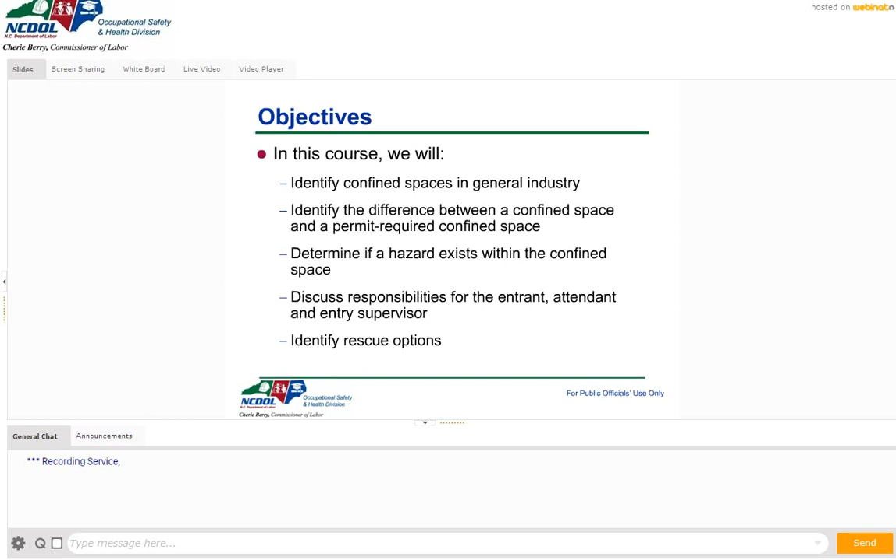And if you have a permit space, you have to pre-plan for rescue, and we're going to talk about rescue options. I've got a couple of videos today. If I have time, I'll show them. We'll see how we do on time. So let's continue to the next slide.

Now, of course, this standard, the general industry standard, contains the requirements for entry into permit required confined spaces, but it does not apply to agriculture, construction, or shipyards because they have their own standards. So right here, you see a manhole cover, and it's very small, hard to read, but it says that it's a permit required confined space right there in the manhole cover.

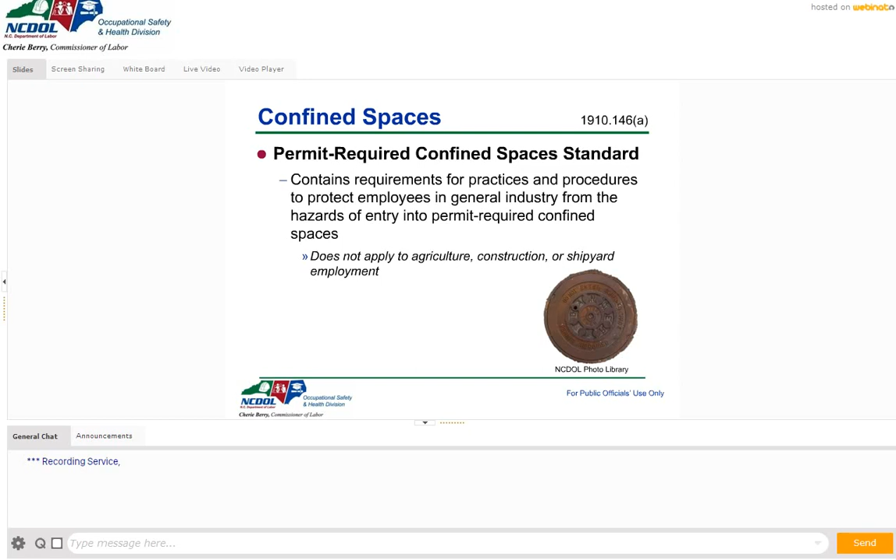Now, many of you already know this, but a confined space is big enough for you to put your entire body in that space and do work. But it also has limited or restricted ways to get in and out. A manhole is not easy to get in and out of. There's usually a ladder built into the side if you go in, or you may have to insert a ladder. It's hard to get in and out.

People typically don't work in manholes all day long. I mean, all year long. It's not designed for somebody to be in there every day of the year. And like the last bullet says, not designed for continuous occupancy. So it's big enough to get in, it's hard to get in and out of, and it's not meant to be a space to have somebody in there all the time.

Now, many of you live in homes. Some of you may be in an apartment, but if you live in a house, what are two home examples of confined spaces? Okay, Michael. Crawl space. And it could be under a trailer, like you say, or under a stick-built house. Attic and crawl spaces. Those are confined spaces.

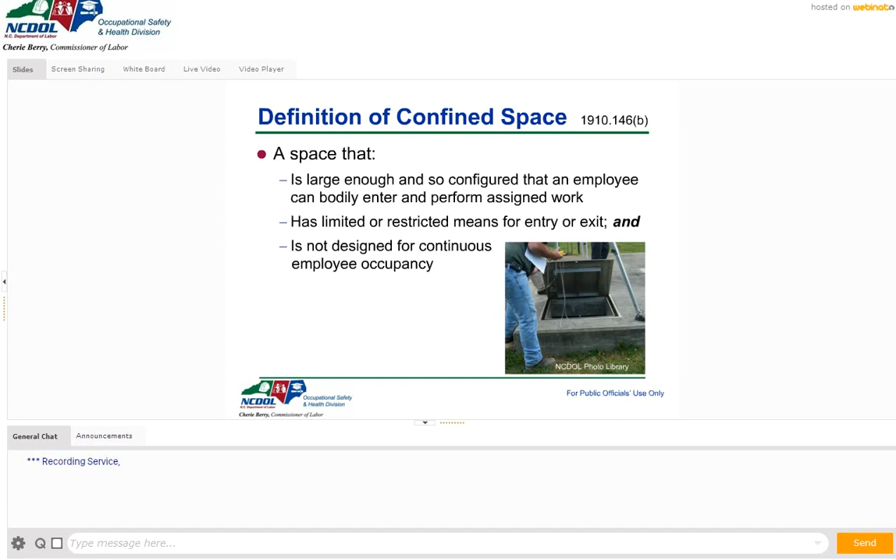So the thing that makes a confined space a permit space is all these three things that we've listed here, plus it either has a hazard or a potential hazard. And I would say reasonably anticipated potential hazard. So that's what would make it a permit space. But regular confined spaces may or may not be permit spaces.

Are you sending an employee into a tank, into a manhole sewer, into a grain storage bin, boilers, ducts, tank cars, vaults, sewers, pipelines, certain equipment and machinery, tunnels, open top spaces greater than 4 feet?

Now, if you walked along a floor and you saw a big square area recessed into the floor that was 4 feet or deeper, and there's no way to get in and out of that space, automatically that would make it a confined space. If it's a permit space or not, that depends on whether there's any hazard or reasonably anticipated hazard in that space. Now, I want to give you a common example of a permit required confined space that you may have at your workplace.

Now, everybody out there, I don't care if you work for the government or private sector, you all have trash. And what kind of confined space that might require a permit could there be? Now, a dumpster. A dumpster is a good example of a confined space that might not necessarily be a permit space. And Stephanie, you're going right into what I'm looking for.

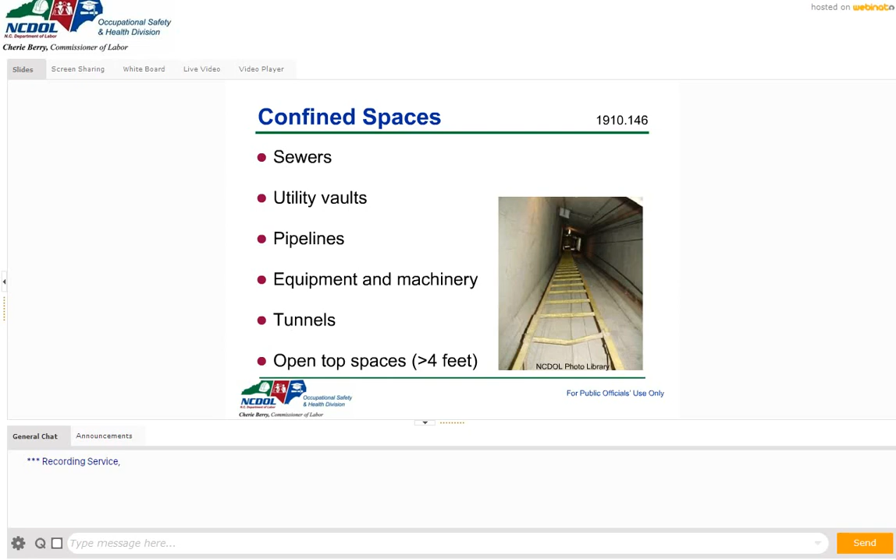But if you have a trash compactor, the way I look at it, I would have that thing labeled permit required confined space, do not enter. If you can eliminate all those causes, then you can reclassify it just for that particular entry as a non-permit entry. Okay, so let's keep going. Now, permit spaces could have several hazards. Could a trash compactor have a hazardous atmosphere inside there? Is that possible? Yes, absolutely.

Does the space have inwardly converging walls or sloping floors? So you got things like tanks and grain bins where you can slide in, it gets narrower and narrower, or you can become entrapped, or you can be engulfed. If you're in a grain bin and you fall in there, it's like quicksand. You fall into the grain, you start moving around. That allows your body to go deeper and deeper, and the grain collapses around you, and you can't even breathe, and you die in there. So like a grain bin.

Engulfment could be from water. When you enter the confined space, are there pipes in there with water supply? They could break or for some reason open up and engulf the entrant. Or there are any other recognized serious safety or health hazards. Now we're going to talk about a lot of the different hazardous atmospheres, but there could be other hazards. You can have snakes in there. You can have moving parts in there. You can have electrical in there. So you need to know your stuff before you or somebody tries to go in there, because you don't want anybody to get hurt.

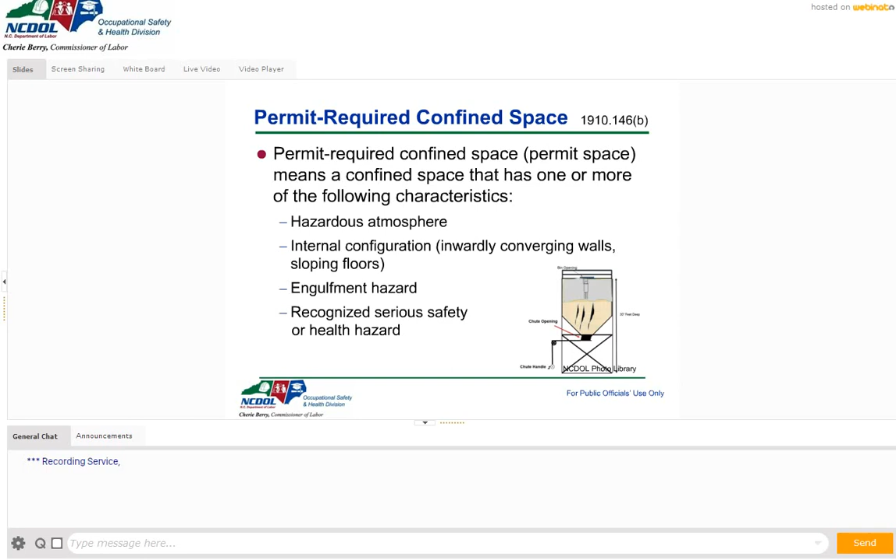Now, other hazards: not enough oxygen. Now, what percent oxygen would be considered low oxygen? How much oxygen? Less than what? This is for your advanced students.

Yeah, actually, it's less than 19.5%. 19 is pretty close. So this 19% is oxygen deficient, so you're not going to go in there. You're going to be doing an investigation. And Michael, that would be less than atmospheric, but there's a range. There's a little variability on your oxygen content in the atmosphere.

So, if it's oxygen deficient, your employee could die in there from not having enough oxygen, or it could have too much oxygen. If there was too much oxygen in there, of course, that could be from some oxygen supply. What would that cause? Potentially, too much oxygen. What would that support? Too much oxygen. Combustion, right, or fire or an explosion.

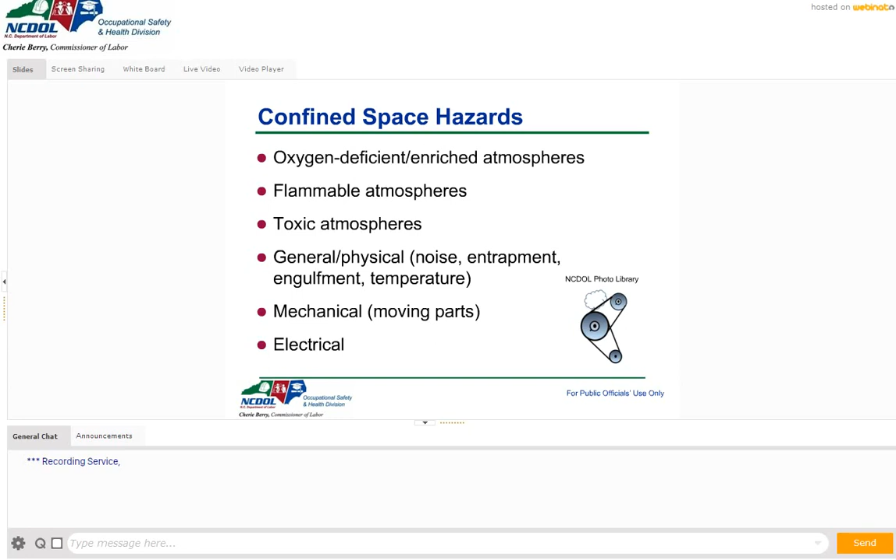Okay, now let's go to the next slide. Now we want to eliminate our hazards or control them. You want to lock out moving parts, de-energize your electricity, block steam, blank steam pipes and in-feeding pipes, pump out liquid content. So if you're going underground and the space is full of water, we're not going to send somebody down there to work. We're going to pump that out. And we're going to monitor the air and ventilate the space.

Now, because this was a permit required confined space entry, we had to sample the air.

So if you're a company that you're doing a permit space entry and you're checking the atmosphere, how many levels of monitoring are you going to do? Bottom, top, middle? How many levels? At least what? How many levels of monitoring are you going to do? I'm talking about how deep. Does anybody know? I know somebody must know. How many? Okay. The answer is 3.

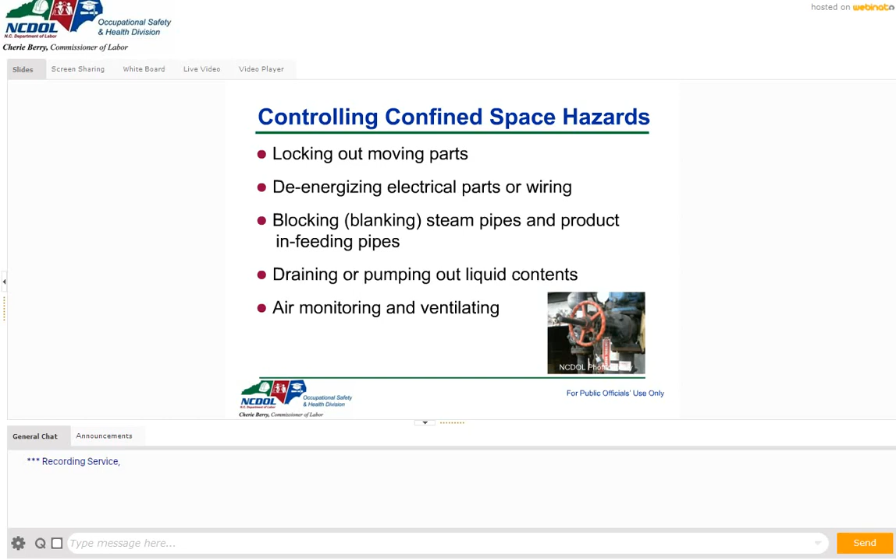So if you're checking out a space prior to entry and you're following your permit and you get your meter and you check the atmosphere, you're going to check the top of the space, the middle of the space, and the bottom of the space. And you're going to give your air sampler time enough for the sample to get to the meter itself. Okay, you're going to do 3 levels of monitoring. All right, let's keep going.

Now, we'll get back to the permit procedure in a few minutes. Now, this slide says if you have a workplace and it contains permit spaces, the employer should let everybody know by posting signs or any other equivalent and effective means. So if I go to your work site and I say, do you have a confined space program? Yes, we do. We have permit space. Are they all labeled? Yes, they are. Good.

If their permit spaces were not labeled, we would have to interview every employee and say, can you name all the permit required confined spaces? Now, if it's a big site, I'm betting that they can't do that. So this says other equally effective means. So if you didn't mark them, everybody would have to know. I would not want to depend on that. And you would also have to have a controlled site where nobody else could get on your site. So not having a mark would not be a good idea. Okay? That's required right in the standard.

Now, if you decide that all your employees will never enter these spaces, you've got to have a measure to keep all your employees from going in there. So, how would you? And now manholes, we can have HVAC units. You can have a lot of other places people could go. But how are you going to keep people out? How do you keep them out of a permit required confined space? How do you keep people out? Well, I'll let you all type in the answer. How do you keep people out of permit spaces?

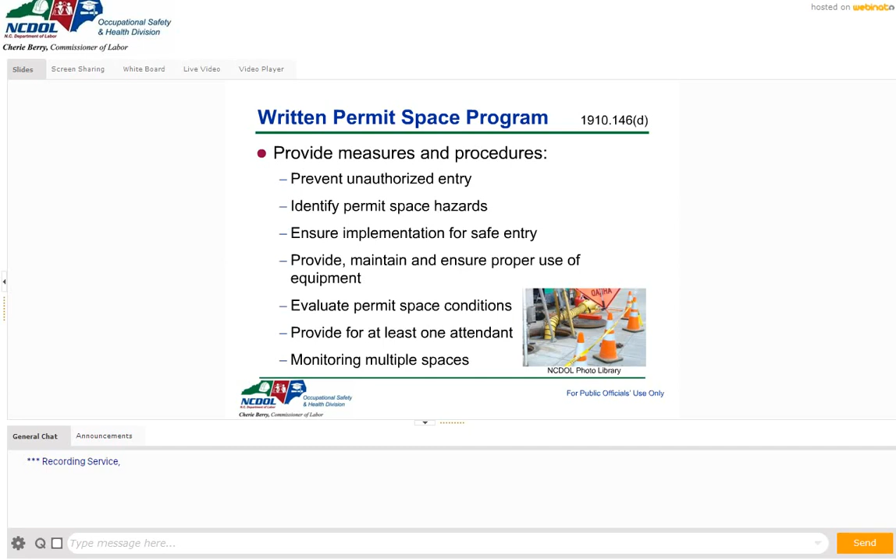How do you determine who does what? You're going to train your attendants, your supervisors, your entrants. How do you summon rescue? And we're going to spend a bit of time on rescue. How do you prepare, issue, use, and cancel permits? If you have a supervisor that issues a permit, they may cancel it because it's outside and a rainstorm develops, a storm develops, some conditions change.

How do you conclude entry? How do you coordinate with other employers? You may have contractors working with you. And how do you review your program annually to make sure it's current and nothing has changed?

So, with your confined spaces, you could have spaces that never require a permit. Those are just your regular old confined spaces, and there's nothing in the world that could develop to make them into a permit space. Or you could have spaces that all you'd have to do is ventilate those spaces, and you would not have any other hazards, and you would not have to use a permit. Or you have spaces that have more than one hazard, and that would require a permit system.

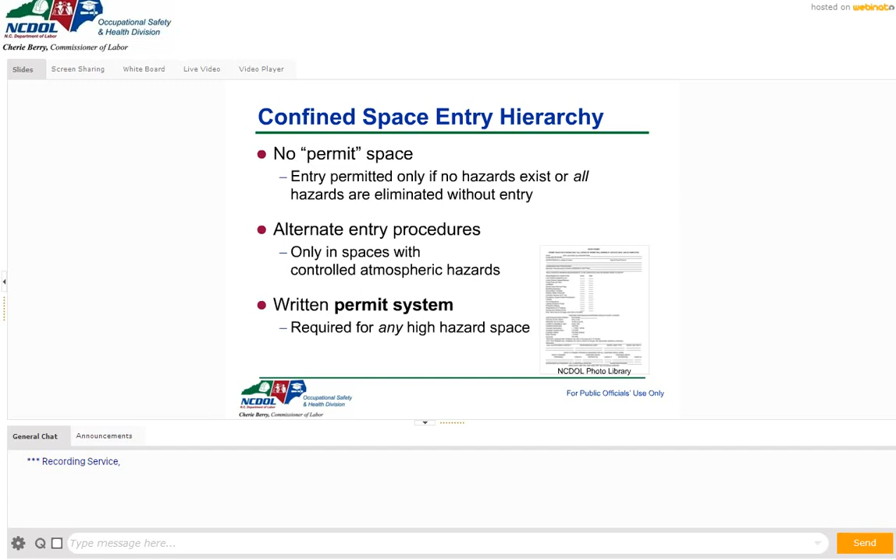Now, I will tell you, when I was in industry, I worked in a best practice facility. I worked for two companies that were Carolina Star, and anytime we sent somebody underground, we never reclassified any of those as non-permit spaces because too many things can happen underground, too many variables. We could have gotten by with reclassifying some of them sometimes and just do ventilation only, but anytime we went underground, we said we're doing a permit every time to be safer.

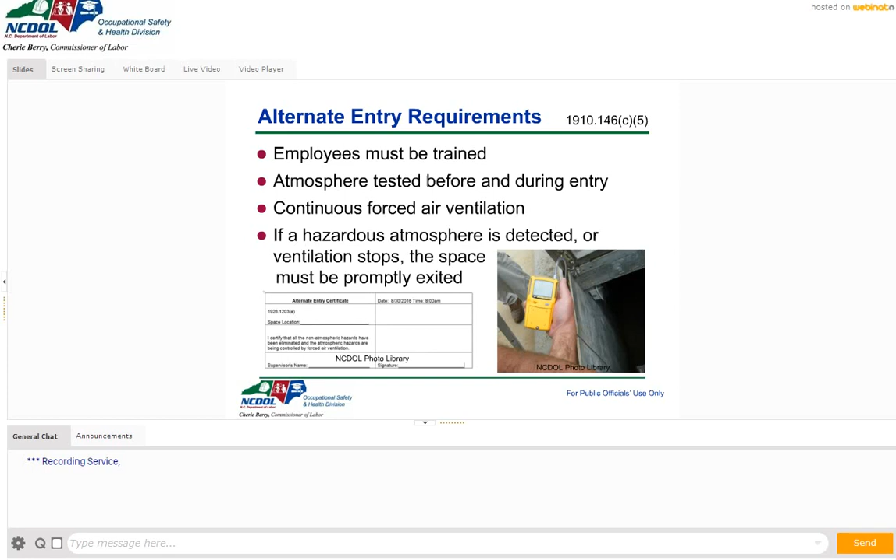Now, if you do alternate entries, your employees have to be trained, you have to test your atmosphere, you have to use forced air ventilation, and of course, if you ever detect a hazardous atmosphere, you must stop the entry. So that's your alternate entry. Now, this will be a little bit easier to understand if you look at the flow diagram that we're getting ready to go into. Here in a few minutes, we'll get to it.

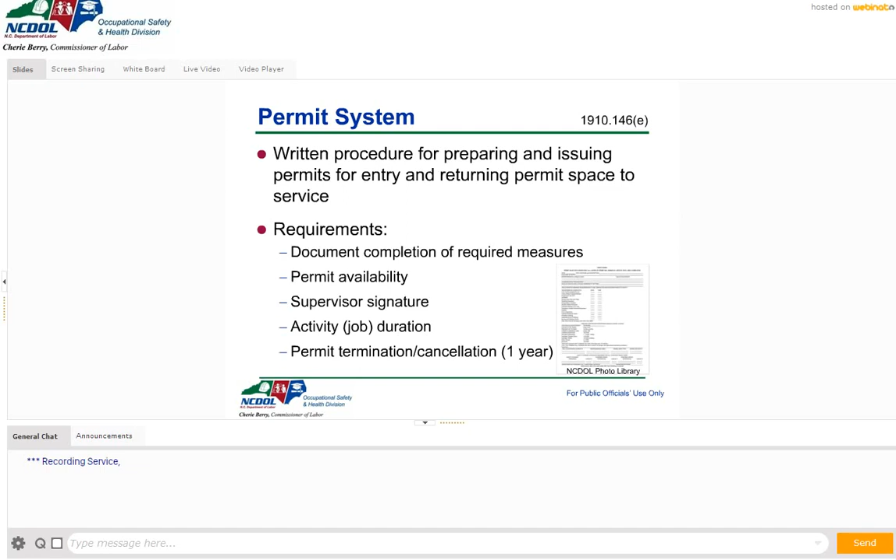Your permit system, you're going to have a written procedure for how you do it. And you've got to make sure your document's properly completed, that it's there at the site, it's available, that the supervisor signs it. You've determined your job duration. And those permits that you issue for permit entries, they must be reviewed within a year to make sure that they're still good, that the spaces have not changed in any way.

So when you have somebody entering one of these spaces under a permit, it's got to have a place for what is the space, why are we going in here, when and how long is the person in there, who are the authorized and trained entrants, who is the attendant, who is the supervisor.

Now, go ahead and ask you a question. Can an attendant be a supervisor and an attendant, or do you have to have two separate people? This is really a good question. I'll wait for some more answers. Actually, the answer is yes. You can. You can have a situation where the attendant is also trained and authorized to be the supervisor. Now, where I worked, we had separate attendant and supervisor, but the standard does allow, if they're properly trained, to have the attendant be the supervisor as well.

The permit's going to talk about the hazards within the space that you've addressed, how you keep the space isolated, and what the acceptable conditions are.

Well, good, Michael. And that's fine, Michael. I mean, a great answer would be two. Ideally you would have two separate people, but there are situations where it's acceptable and safe to have the attendant be the supervisor, have both roles. But when I was in industry, essentially our maintenance folks would be the ones that went into the spaces, and the maintenance supervisor, who was a supervisor anyway, was the confined space entry supervisor, and they were all trained.

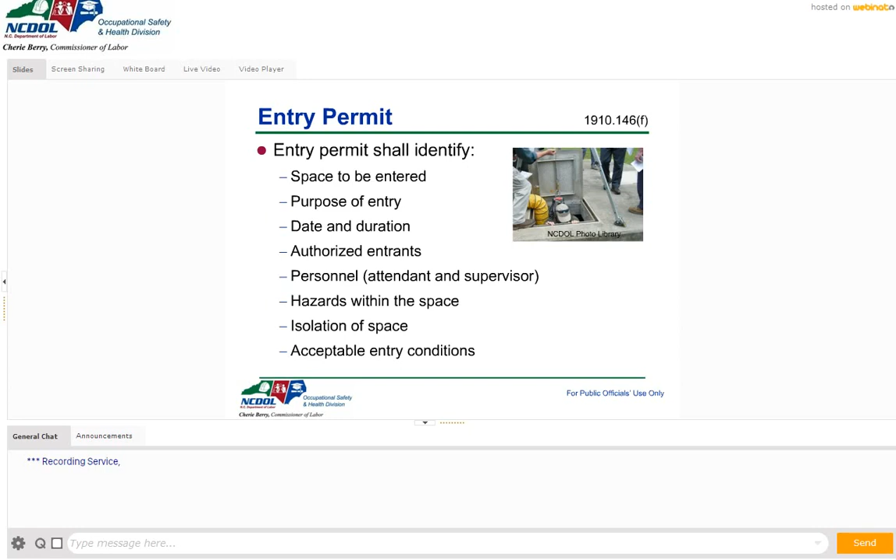Okay, now your permit's going to have your results from your air monitoring. It's going to specify what safety equipment you're going to have on site. How do you control the hazards? How do you communicate? There are a lot of different ways you can communicate. You don't necessarily have to have radios. Some people use ropes. They use knocking, or they may have direct voice communication. There are a lot of ways to do that. And your permit's going to have the rescue and emergency services information on there.

Now, this is where you really need to be careful. And this is why a lot of people die in confined spaces. You'll have a good company, they just don't know any better. They'll create a confined space entry program, and in their program they don't do rescue. And what do you think's on their permit for rescue? This is a good company. What's on their permit? Fire department, right, David. They'll put in an emergency call 911 or the fire department.

Do you think in most cases, now let's just talk about hazardous atmosphere, do you think most of the cases the fire department can get there fast enough? What do you think about the response times? No, that's exactly right. So what happens, let's just play worst case situation. The fire department responds, and instead of having one victim, they've got three. They had two people try to rescue, and they got three bodies at the bottom of the space, and it becomes a recovery operation.

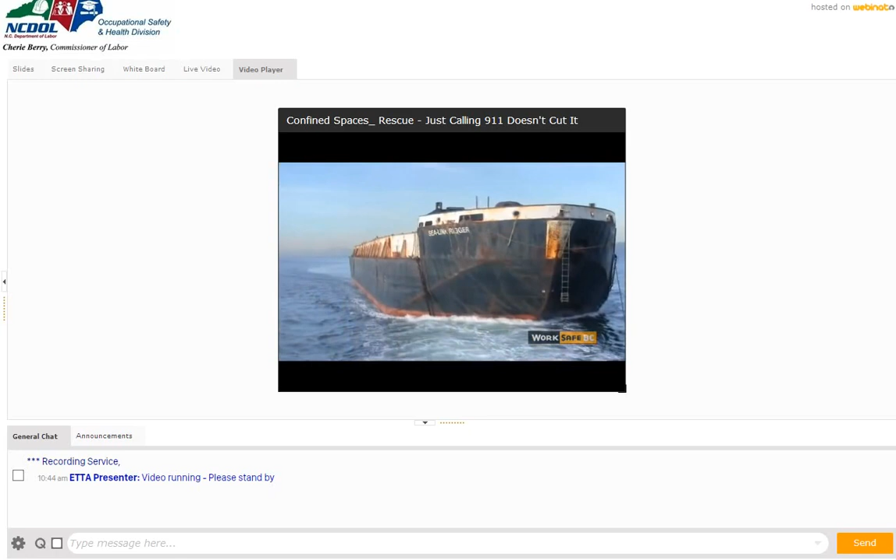It happened in a vat at a winery in the Okanagan, in a shed at a mine in Kimberley, and in the rusty hold of a barge in New Westminster. Each time, workers died when they entered a confined space with not enough oxygen to breathe. Even worse, rescuers who tried to save them also perished.

Incredibly, about 6 out of every 10 people who die in confined spaces are would-be rescuers. This sobering reality means that for any work around a confined space, there has to be a rescue plan that's tested and ready in advance. The rescue from a confined space is, in most cases, a body recovery. You're going in to pick up somebody who has died as a consequence of an exposure to a toxic atmosphere or low oxygen. It's a real problem.

Can you hear me? Can you move your feet? I can see a foot. Can you wiggle it for me? Try and move that foot a bit. Okay, patient's unresponsive. Rescue 1, let's get ready to go. Rescue 1, ready to go.

If you follow the procedures, you have a proper confined space entry program. You do hazard identification and risk assessments. You look at what the job function is going to be, what you're doing in the space. Are you going to create any airborne contaminants? And you have an atmospheric monitoring program in place. You have a lockout and isolation program in place. If you do all those things to mitigate the hazard to the worker, you probably shouldn't end up putting a worker in a potential rescue situation.

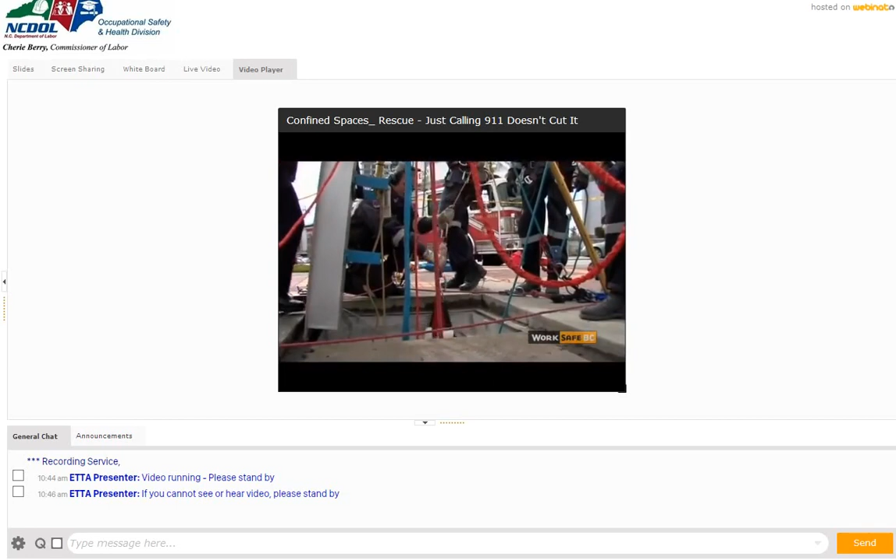But you always have the medical component. Somebody has a heart attack or a medical problem within that space. How are you going to get them out of that space? And who's going to do it? Most modern fire and rescue departments have some technical rescue capability, a skill that requires constant training and practice. That being said, industry must take responsibility for assessing risk and preparing to deal with it. Industry used to say, well, we'll call 911 in the event, but some jurisdictions, some municipalities don't have that capacity. Some fire departments are small and they don't have a confined space rescue capability within their department, so just calling 911 doesn't cut it anymore for a rescue plan.

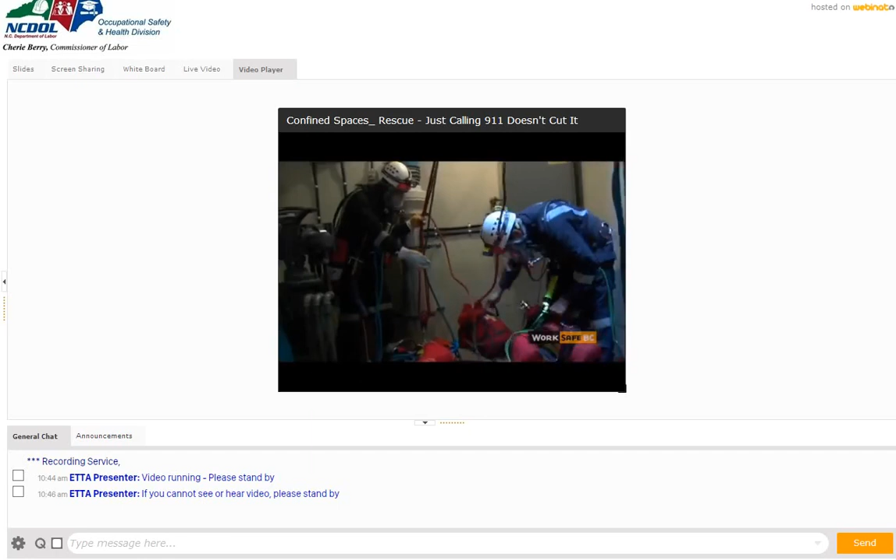We train right now. Last year our team documented 5,400 man hours of training for that year. The key point is competency. Is that team capable, equipped, and able to perform a rescue? And a rescue doesn't mean that you have a tripod sitting here and you got a winch. It means you need to have a plan in place, and you need to practice that plan, and that you can actually extricate somebody out of that space. Human nature is such that we assume things are reliable and predictable, but when it comes to working in a confined space, the dangers are often invisible. Response time is critical, but so is ability. The path to hell is paved with good intentions, and these people go in and they try and rescue, and they end up being victims themselves.

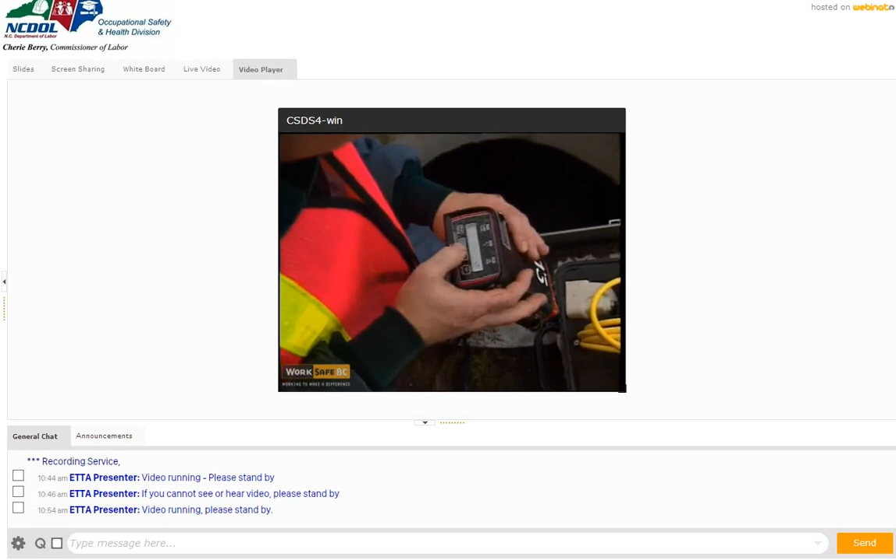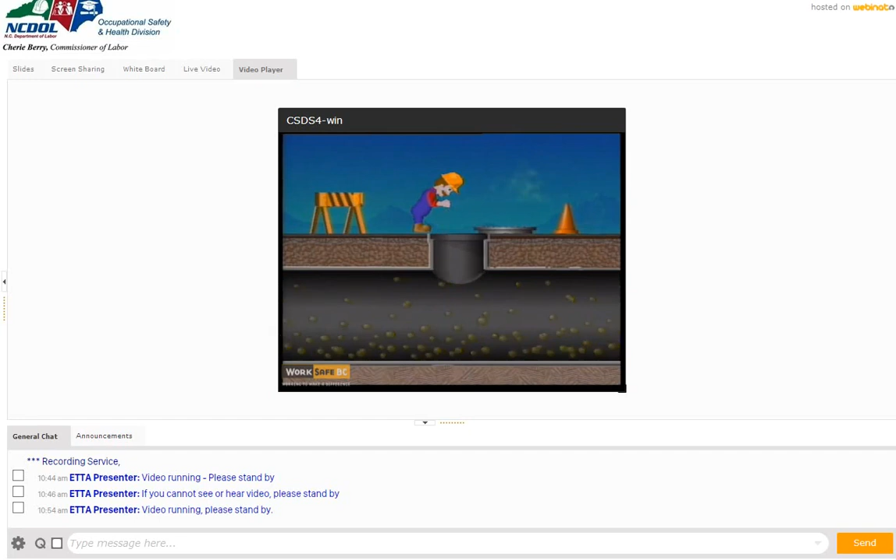Before entering any confined space, ensure that the surrounding area is free from hazards. Test the atmosphere before you enter a confined space. It's essential that you take samples at various levels throughout the space. The first test to conduct is for oxygen. Oxygen deficiency can occur at any level. Some gases, such as hydrogen sulfide, are heavier than air and could settle on the bottom of the confined space. Methane will displace oxygen. It is an explosive gas and is lighter than air. Carbon monoxide has about the same weight as air, so it can be evenly distributed throughout the space. It's an asphyxiant, which prevents your body from absorbing oxygen, causing you to suffocate.

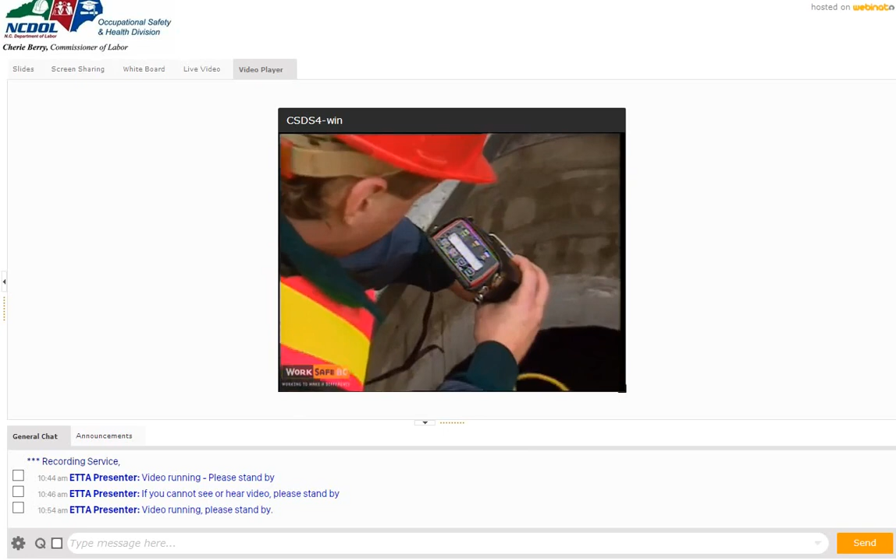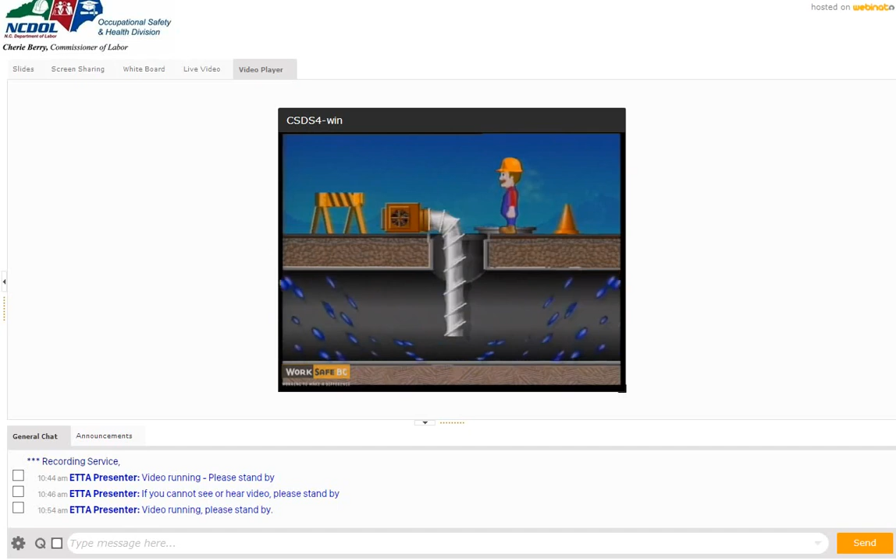Ensure that the tests are taken by a trained worker, and the results are recorded in a logbook or on an entry permit. If gas levels are unsafe, you must first ventilate and then retest before entering. If the gas levels are within safe limits, you must still ventilate the space before entering. Never use the ventilator like a vacuum to draw air out of the confined space. It may draw in toxic gases from other parts of the space. The fan must blow fresh air into the space. Ventilation will provide a continuous supply of fresh air and prevent the buildup of contaminants. While workers are in the confined space, ensure that there is a worker on watch who can summon a rescue crew in case of emergency, or is capable and equipped to conduct a rescue.

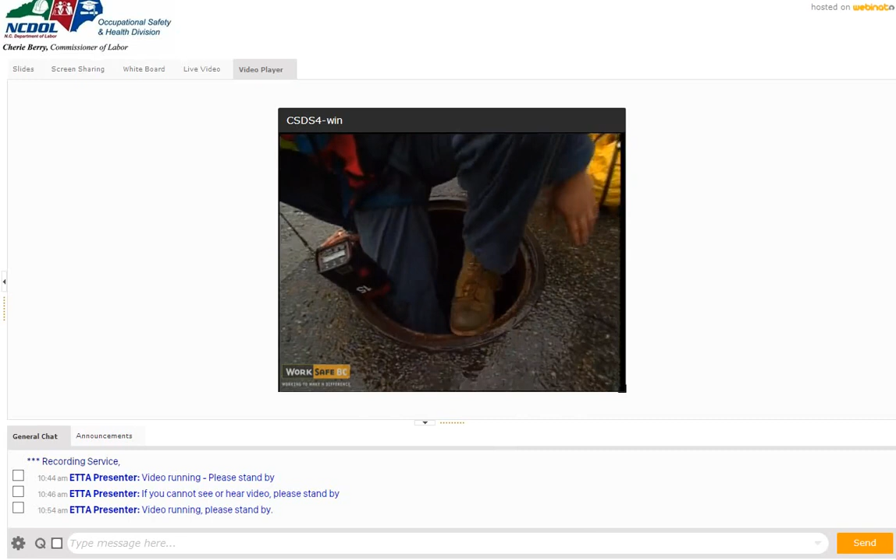Depending on the hazardous nature of the work or type of confined space, more sophisticated equipment and procedures may need to be used. For instance, workers may need to use a harness or lifeline attached to a tripod and wear a continuous gas monitor. There are even situations where a worker may have to wear a self-contained breathing apparatus.

In summary, ensure the surrounding area is free of hazards. Test the atmosphere inside the confined space. Ventilate the confined space. And finally, ensure that a man watch has been initiated and emergency procedures have been established.

Confined spaces can be found on many work sites, but their hazards may not be obvious. Preparation and testing are your only defenses against this potential killer. The danger is real, but by following established work procedures, most confined space tragedies can be prevented.

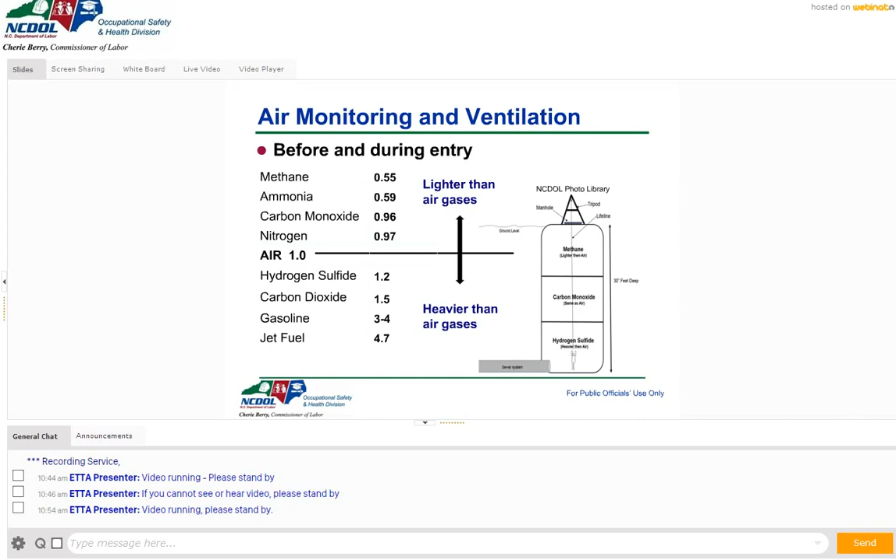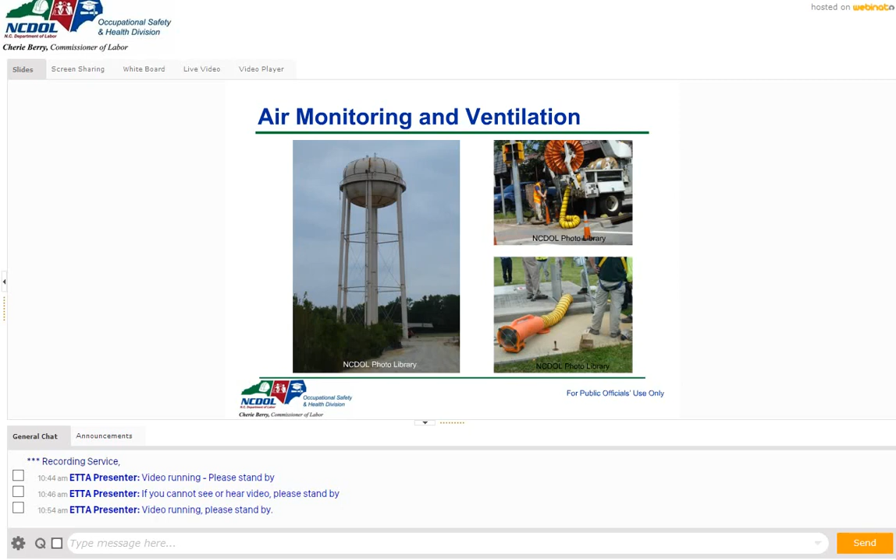Now, you can see there are several different types of confined spaces. It could be a tank, like a water tank. It could be underground. We talked about ventilation. And we talked about the different roles. The entrant is the person that goes in. The attendant is the person that monitors. And the entry supervisor plans, authorizes, and terminates the entry.

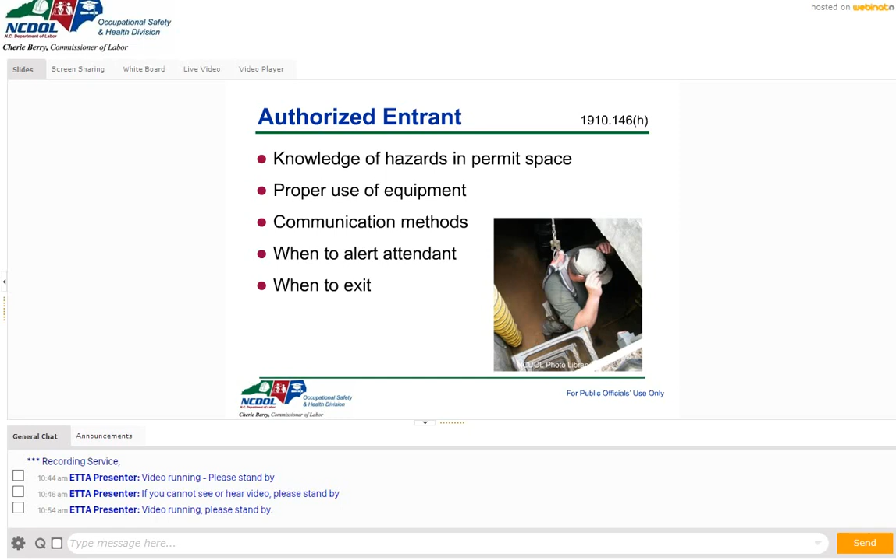Now, you can train people for several roles, but don't put them in a role where they're not trained and qualified. Those are the duties. The person that goes in, they need to know the hazards that have been identified or potential hazards that could develop, proper use of their equipment, how they're going to communicate, when to alert the attendant, and when to get out.

The attendants, the person outside, they know the hazards or potential hazards, and they know the kind of behavioral effects that could be impacting the entrant. If they start slurring their speech or sounding drowsy or something, they would know to do something. They need to keep a count and a log of who's in the space. They just need to stay outside the space the whole time.

They need to communicate with the entrant constantly. They need to monitor everything. They need to keep people away from the space. You may have to set up barricades, those sorts of things around the space to keep people and vehicles away. And if they're not going to be doing the rescue, they need to be the one that summons rescue.

Now, sometimes the attendant, if it's a simple space, will have a winch, and they'll do non-entry rescue. They'll essentially winch the victim out. But can an attendant ever go into the space? It's almost like a trick question. Can an attendant ever go in? They can't go in unless he is replaced. Okay, if you have a situation where the attendant might go in, they have to be relieved before they go in.

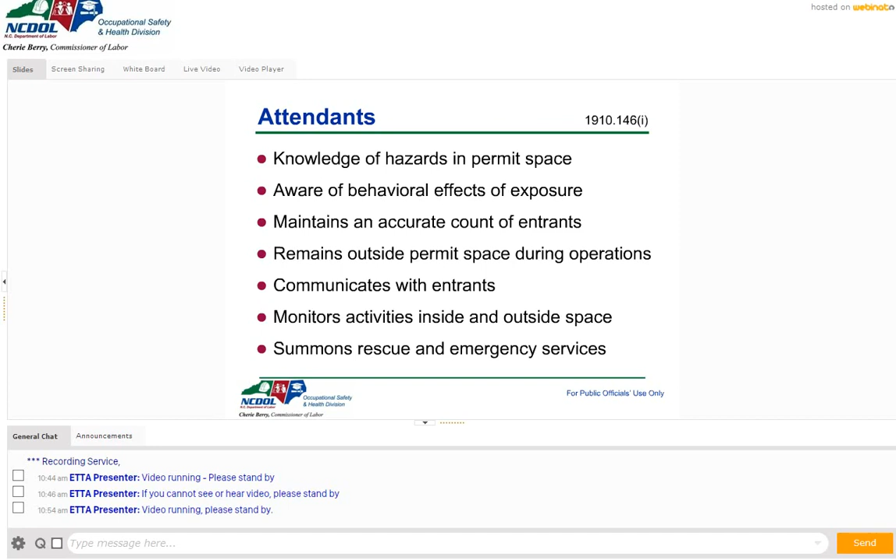Never. Yeah, smoking, leaving the area, walking away. Be on the phone. Leave his or her spot. Right. Now, if they're on the phone, it better be as part of the procedure as far as an emergency, contacting somebody. But they should be attentive because the life of the person inside that space is depending on this attendant. So that's a pretty important role.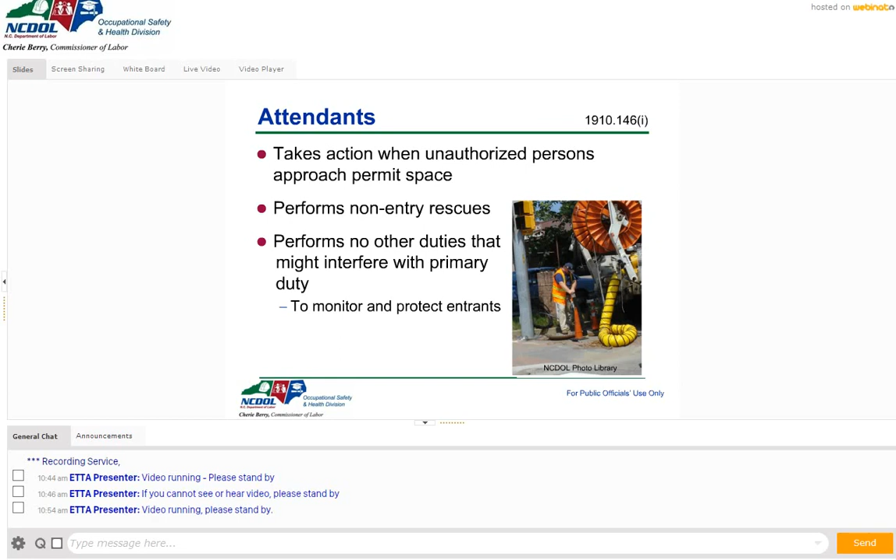So they're going to take action when somebody comes up and approaches the space. Hey, stay away. We're doing a confined space entry. We're not doing a show for people to see things. Stay out of this area. They may perform non-entry rescues, like if they have a winch, and they're not going to do anything that's going to interfere with their duties, like being on the cell phone.

The supervisors, they need to know the hazards. They need to know that the permit is complete. He or she needs to terminate and cancel the permit as required. Now, eventually, the entry is going to be finished, and the permit is going to be closed. That would be the supervisor. And the supervisor may decide to terminate an entry, let's say if it's outside and a storm comes up, for example.

Now, rescue services, they better be close and nearby. And I'm going to tell you right now, in my opinion, that calling 911 is never going to be proper rescue because you're never going to have the response times quick enough if you've got bad atmosphere to rescue somebody. It's just not going to happen.

So if you have the fire department as your rescue, not only should they be there on site, but they have to train with you. When you do your training, they have to train with you. And all your people that are involved, they have to be trained every year. And this isn't just watching a PowerPoint slide show. This is hands-on training. So when we did our training, we would do it at our spaces. Okay, we would, ahead of time, we would do our training.

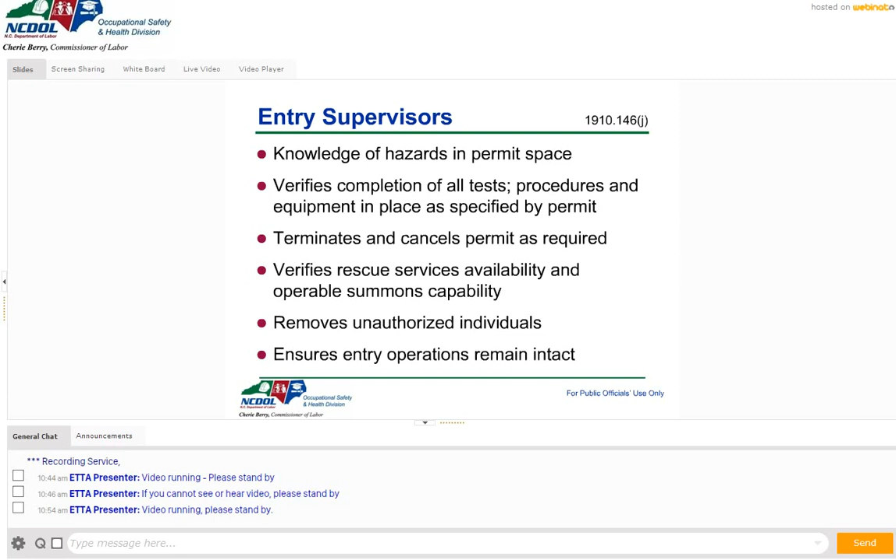Okay, you're going to train the people before they are assigned to duties, and before their duties change, when your operations change, and you're going to see if they're proficient in what they do. You know, if they're doing something, they may not be doing it right. Well, you're going to correct that while they're being trained to make sure they're proficient. I mean, whoever's doing the air sampling, they better know how to use the four-gas meter properly. They've got to remember to bump test it. People have to be trained to calibrate the meter.

Your training documents, you need a certification of training. And what that means, it doesn't mean that they have to have a certificate that they put on the wall. That's not what certification means. Certification means a signed, legally certified training document. Certification is signature, signed training documentation, certification of training.

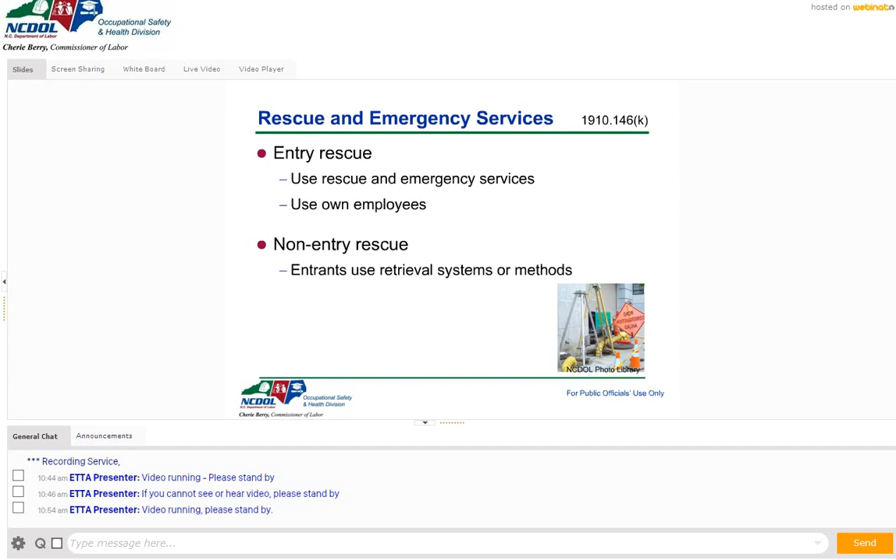Now, rescue, you can have different types of rescue. Use your own people or your own emergency services. Use your own employees to go into rescue, or non-entry rescue, like if you have a winch outside where you're going to retrieve somebody, that would be a non-entry rescue. You may use rescue services. Sometimes you can contract this out. But again, they need to participate in your training. If you're using a rescue service, there's an annual training requirement for rescue. They need to be involved.

So your in-house people, again, need to be trained for rescue. They need to be trained in first aid CPR, and again, practice rescue at least annually. If they're using respirators, then you get into all your respirator training.

Now, we have covered a lot to this point, and I should have stopped way before now. How's everybody doing? Do you have any comments, questions, or are we good to go? Okay, Angie's good, Michael's good, Ashley, everybody's good. Fantastic. And I hope you are learning something. And please, type in at any time. I try to watch the chat. And after the webinar, if I miss something in the chat, I'll respond to the whole class. But I think I've been able to keep up with the chat pretty well.

Now, if you've got a non-entry rescue and you're able to use a winch, the person going in is going to use a harness, and you're going to connect to the D-ring on the back of the harness, or the harness may have a couple of upper rings. You're going to connect to the point which allows you to pull them out of the space. If the hole's too small, you may use other upper attachment points on your harness. It depends on what kind of space it is.

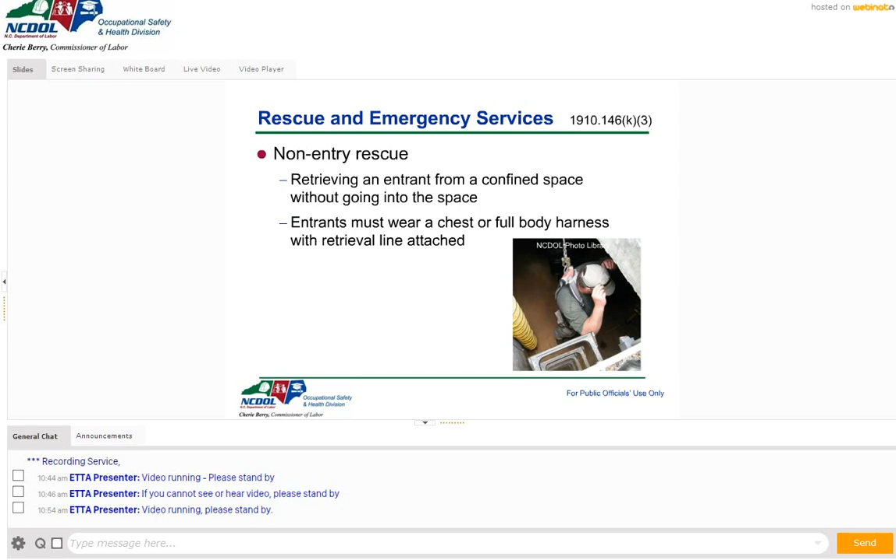And the next slide goes into the appendices. The decision flow chart, procedures for testing the atmosphere, examples, permits, sewer system entries, and rescue evaluation criteria. Those are the appendices.

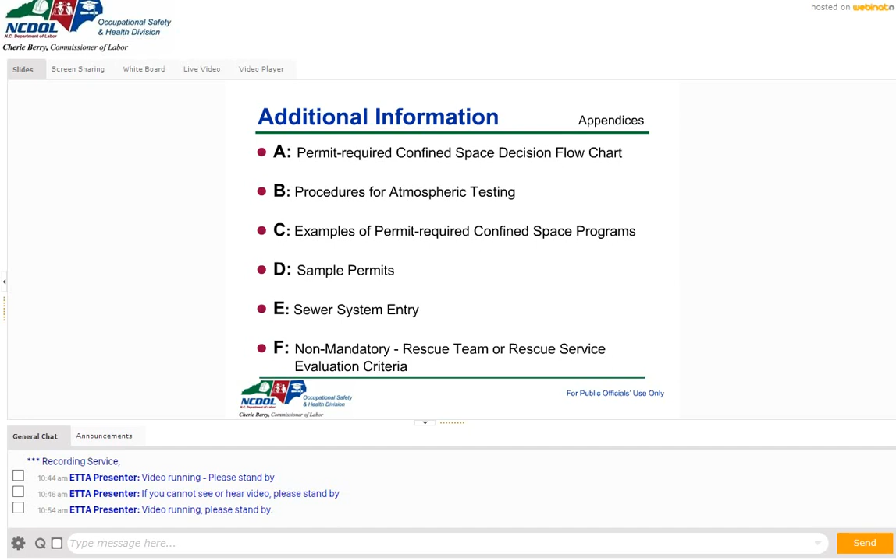Now, I really wish that this was really gigantic on your screen, but it's not. Even if you can see the full PowerPoint slide, you may not be able to read that. But if you've never seen Appendix A, after the webinar, unless you have the standard book right in front of you, go through the flow diagram on confined space entry and go through all the decision points and make sure you understand everything on that flow diagram. If you understand that flow diagram, you probably have a pretty good understanding of the OSHA requirements and what you need to do. So go to Appendix A when you can and go through that flow diagram to make sure you understand that diagram.

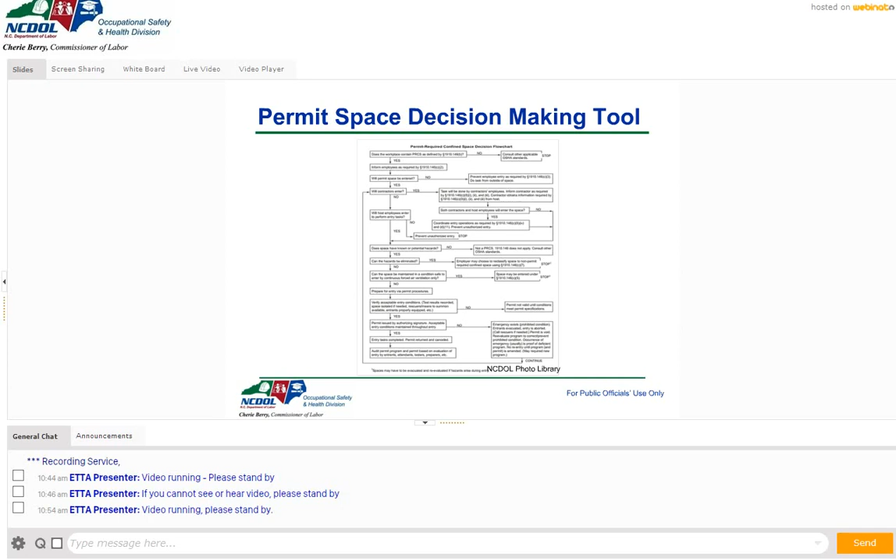If you have any questions about confined space entry, of course, you can call in to our main number and talk to our standards officers that are on duty every day, or you can send an email question into ask.osh@labor.nc.gov. Okay, let's go to the next slide.

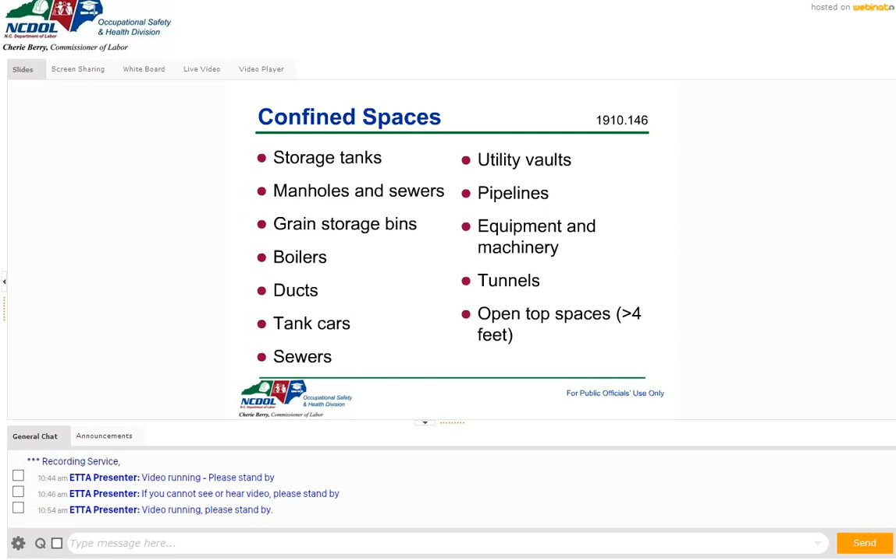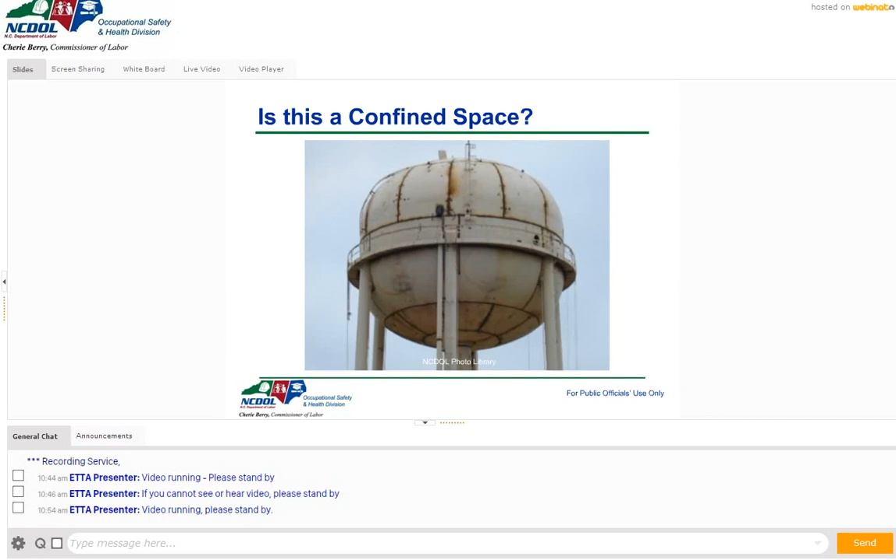Now we've already talked about a lot of different types of confined spaces that you see here on this slide. Is this a confined space? Yes, it's a confined space. Would it be a permit space? I'm saying yes, it would be a permit space. It's a tank. We got inwardly converging walls, and I would imagine if I could see the inside there, there are pipes and different things in the bottom there where somebody could become entrapped. So that's clearly a confined space and a permit space. And we're going to go ahead and say, yes, this is a confined space and a permit space.

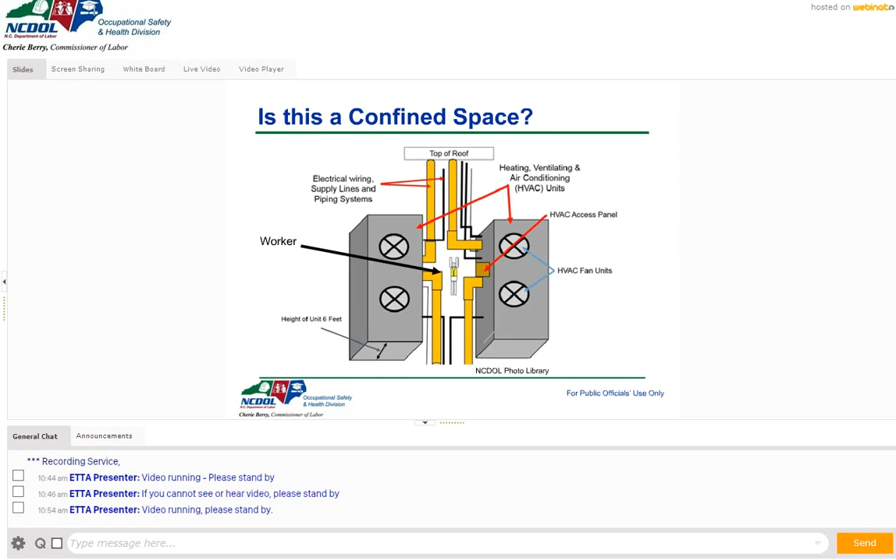Now this is a little diagram that Robert O'Neill drew, and it's showing HVAC units. Now HVAC units, this might be on the roof of a building or near the roof of a building. And you got moving parts, you got fans, you got little spaces people aren't supposed to be in. These units have doors on them. They're moving parts. Those units would clearly be a permit required confined space. So look at your HVAC units. You may need to put signage and labeling on those and have those in your procedures as well. That's an HVAC unit or two units beside each other.

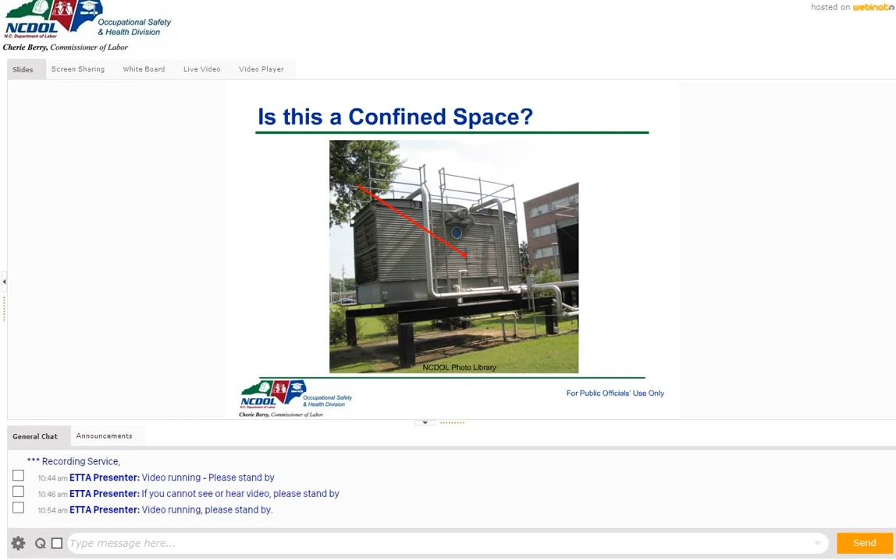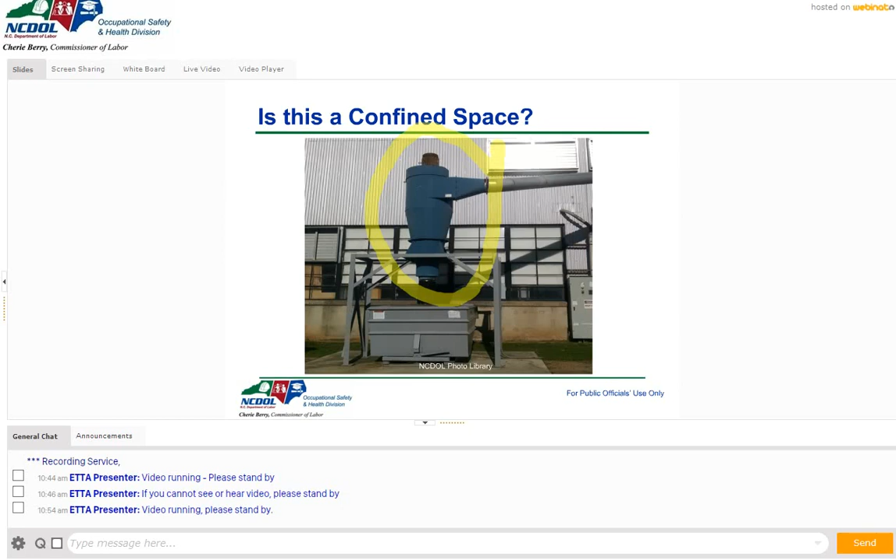Okay, is this a confined space? Yes, it is. Of course it is. Again, so it's not always your underground spaces. Now this looks to be like a dust collector. This is a confined space, and it would be a permit space. You got moving parts, and believe it or not, people have to go inside of there to do service. This is a confined space. It clearly is. It's a tank, inwardly converging walls. Again, a confined space. Now some of these, if you make the opening smaller and smaller and smaller, then you would ask, can a person even get in there?

Oh, let me go ahead and ask a question that we usually get in webinars. Let's say you send somebody into a confined space, like a manhole. If a person walks up and sticks any part of their body in that manhole, is that a confined space entry? Go ahead and answer. If a person sticks any part of their body into that space, is that considered to be a confined space entry? The answer is yes. I don't care what's going on. If you've got a permit space and somebody breaks the plane of that space with their hand, their head, anything, that's an entry.

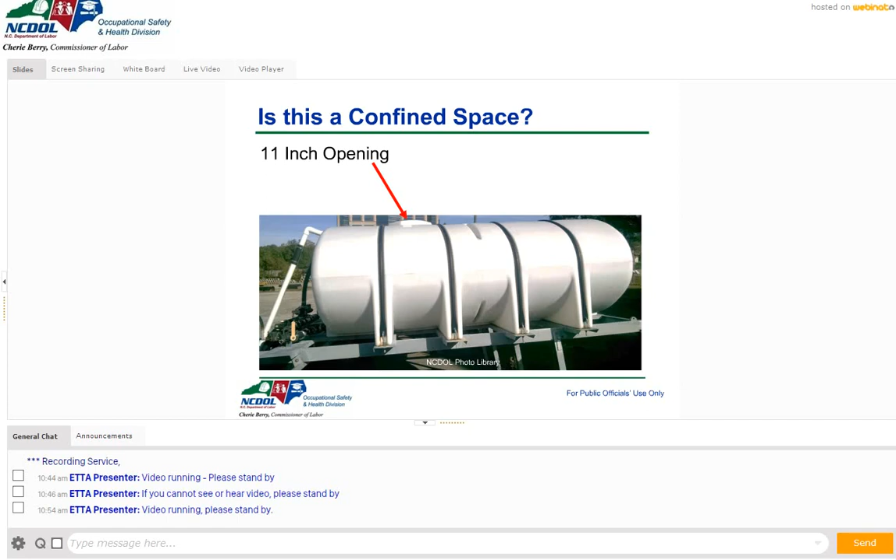Because guess what? You could open up a manhole, just a regular day, open up a manhole, stick your head in. What could happen after you stick your head in? Fall in. Or you could be overcome by gas. You could be overcome by gas and then fall in. So if somebody says, are they doing a confined space entry? I see that's a permit space. They say, well, no, they're not putting their whole body in there. No. If their whole body could go in there, if there's any part of their body that goes in, that's considered to be a confined space entry.

Again, a confined space, this could be taken off. Somebody could go in there. That would be a permit space.

So today, we've talked, of course, a lot about confined spaces and the difference between a confined space and a permit space, and about hazards and the responsibilities for the people that go in, that watch over the space and supervise, and the rescue options.